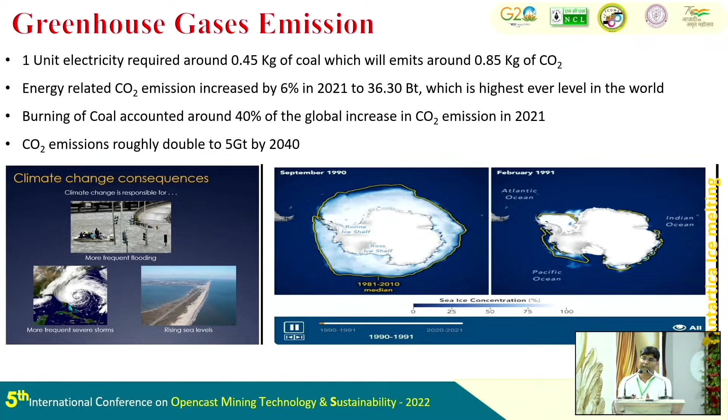For mitigation, India has made commitments for 2030, we have to reduce fossil fuel use and increase renewable energy. But in absolute terms, as energy demand is increasing, we will require more fossil fuel and coal. So for the net zero concept, by 2070 we have to achieve net zero.

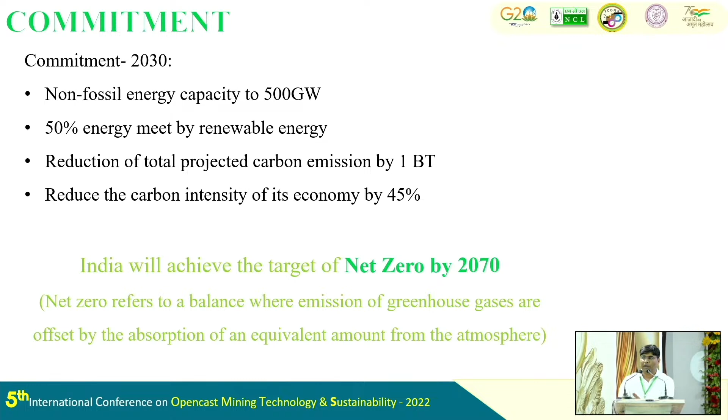For this, I have shown a concept of carbon dioxide sequestration, carbon capturing and CO2 sequestration. Basically, carbon dioxide sequestration is sequestrating the carbon dioxide in any sink where it is retained for a long time. That sink can be a chemical sink or a geological sink. Here we are talking about the geological sink.

Geological sinks may be unmineable coal seams, deep saline aquifers, and others may be depleted gas and oil reservoirs. In our concept, the coal seam is most important for us, since we are concerned with the coal sector. So we are talking about how we will be able to sequestrate carbon dioxide in the coal seam that is unmineable, so it may be sequestrated for the long term, meeting the net zero concept of the nation.

So the coal will absorb the carbon dioxide, and that absorbed carbon dioxide will be in 3 phases: free phase, dissolved gas, and adsorbed phase, with around 95% of the carbon dioxide sequestrated in the adsorbed phase. This diagram shows that absorption may occur due to van der Waals forces.

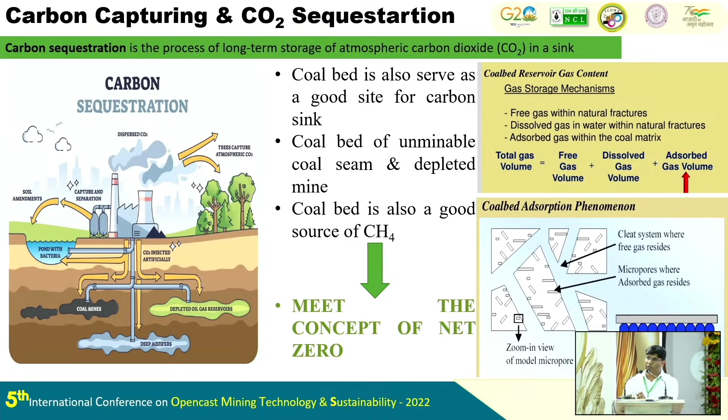This is a schematic diagram. We are showing how we can pump the carbon dioxide into the coal seam, where CH4 methane is in situ in the coal seam, that is CBM. That may come out as a consequence of the sequestration of the carbon dioxide.

Around 4 molecules of carbon dioxide will be sequestered, and 1 molecule of methane will be desorbed from the coal bed methane. This is the schematic diagram showing how the sequestration will take place.

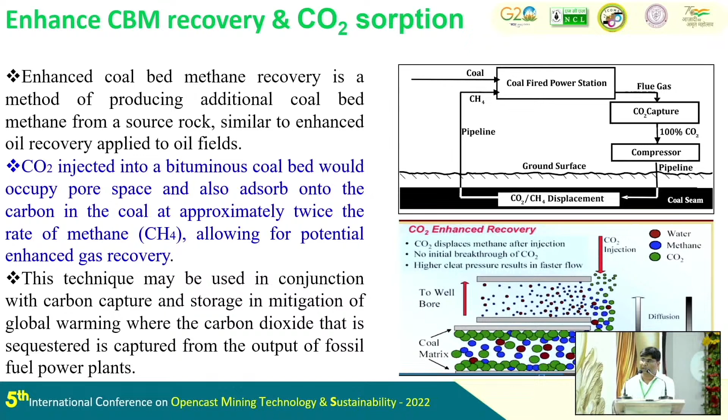This is our study area, the main basin of Singrauli coalfield, where some of the area covers the Raniganj formation and Barakar formation, with thin seams occurring. There is 0.2 meter to 2 meter thickness, and around 30 square kilometer area is demarcated for the study.

The Raniganj formation has 4 number of coal seams and the Barakar formation has 7 number of coal seams, and very thin seams occur there.

Depth is around 720 meters. Depth is very important because without sufficient depth we cannot have the pressure required to retain the carbon dioxide at in situ stages.

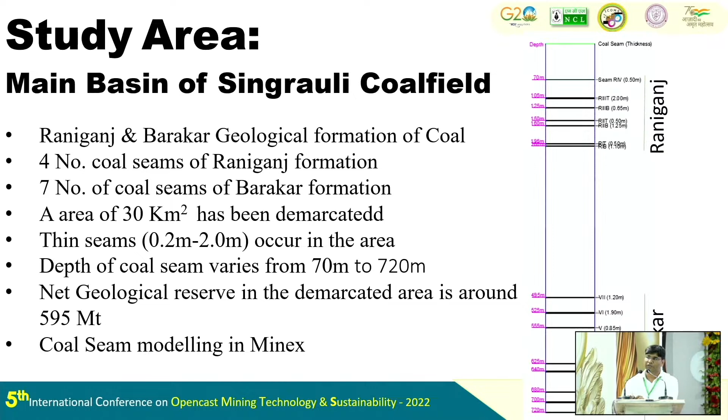So in the future, that area cannot be expected to be mined by either open cast or underground mining, since it is a very thin seam.

Two models have been used for the prediction of carbon dioxide absorption in the coal seam: the Langmuir equation and the GA prediction model. Here I have shown a graph.

As pressure increases, both carbon dioxide absorption and methane absorption increase, but carbon dioxide absorption increases more compared to methane. So 4 molecules of carbon dioxide are absorbed and 1 molecule of methane is desorbed from the coal seam at the same time.

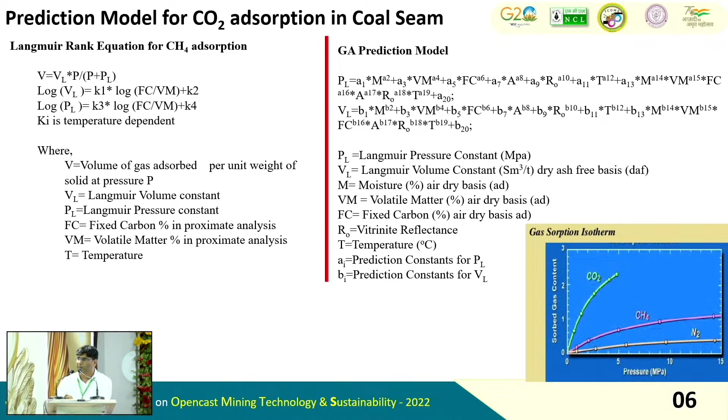That will be a boon for us. We can absorb a huge amount of carbon dioxide and store it long term in coal seams that are not mineable. That is very much beneficial for us, for the climate and for us as well.

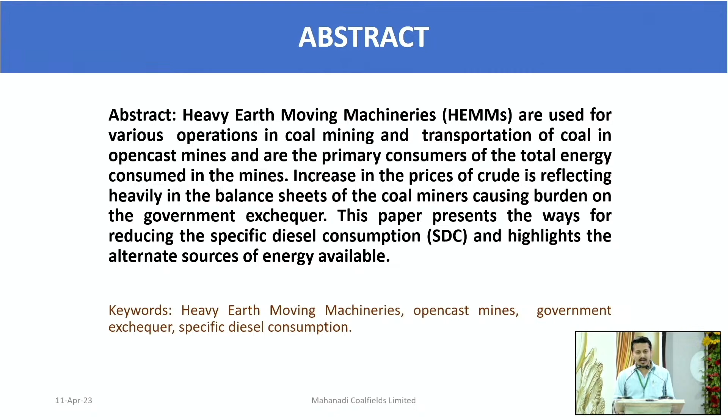Everyone in this house knows that mining is critical to India's energy security. India is the second largest producer and consumer of coal. The importance of coal for a country like India can be defined simply: even today, 75% of the total electricity consumed in the country is through thermal power plants. The coal ministry has set a mission of augmentation of coal production using government companies and also through private captive mines by following sustainable methods of mining.

As per the Atmanirbhar Bharat policy, the government needs to reduce its import dependence on coal, and is planning to tap the current reserves of coal available in our country. Diesel consumption is an important parameter when considering the competitiveness of the mining industry. Effective control on the consumption of fossil fuel helps mining companies improve their environmental ratings, and also helps in reducing greenhouse gas emissions. Hence, mining companies are now looking into reducing energy consumption to lower cost and emissions.

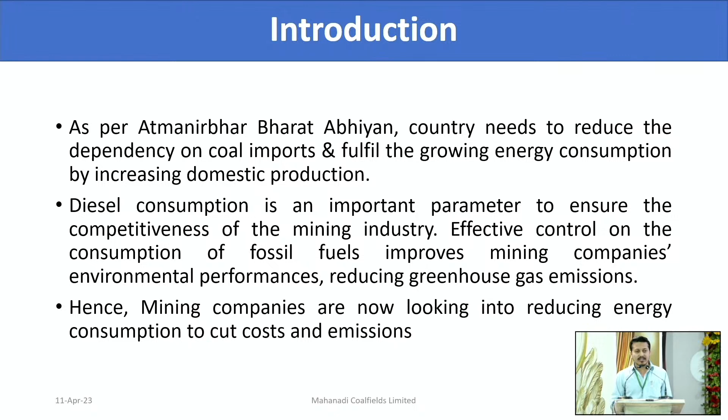Now let me come to open cast mining. Open cast mining is a surface mining technique of extracting minerals from the earth through an open air pit. Open cast mines are used when deposits of commercially useful ore are available near the surface of the earth. To create an open cast mine, miners must determine the availability of ore, done through drilling of probe holes and plotting them on maps. Before starting a mining operation, it is important to consider the quality, quantity, and economic value of the ore available beneath the earth.

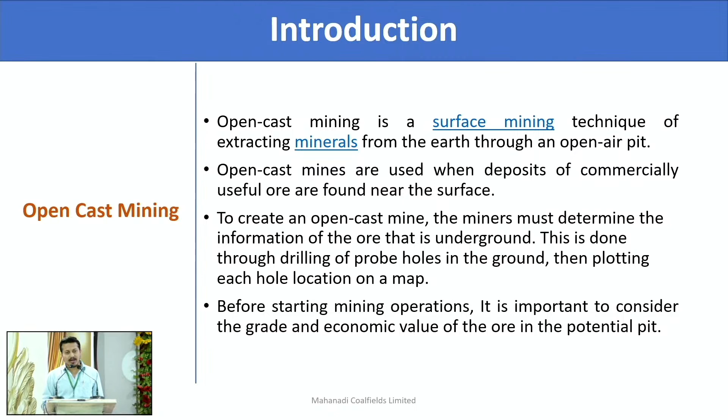Opencast mines are typically enlarged until the mineral resource is exhausted or it becomes uneconomical to extract the ore due to the increasing ratio of overburden. Currently in India, almost 95% of the total coal produced is through the opencast method of mining. The table below shows how at the time of independence, only 6% of coal was produced through opencast mining, but today 95% of total coal produced is through this method. This shows how important opencast mining is in India's energy scenario.

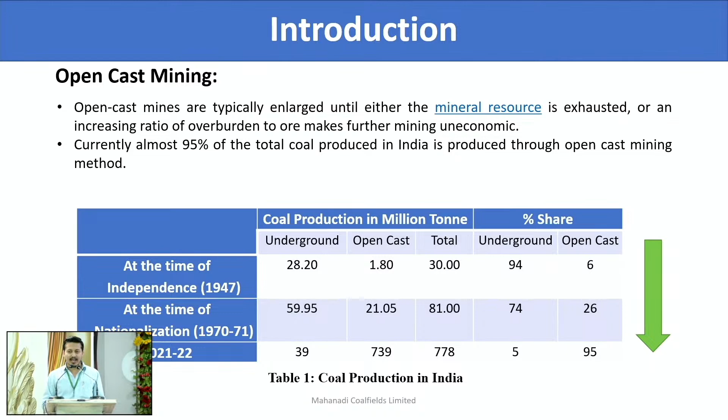Now let's come to specific diesel consumption in opencast mines. Diesel is a significant source of energy in the mining industry. It is used for removal of overburden, extraction of coal, and transportation of coal from face to pithead or to dispatch points. In opencast mining, various parameters affect diesel consumption, such as mine plan and layout, speed, payload and cycle time, tire wear and rolling resistance, age and maintenance of vehicles, dump site design, idle time, engine operating parameters, and transmission shift patterns. Besides this, other factors affect vehicle performance, such as weather and topographic conditions.

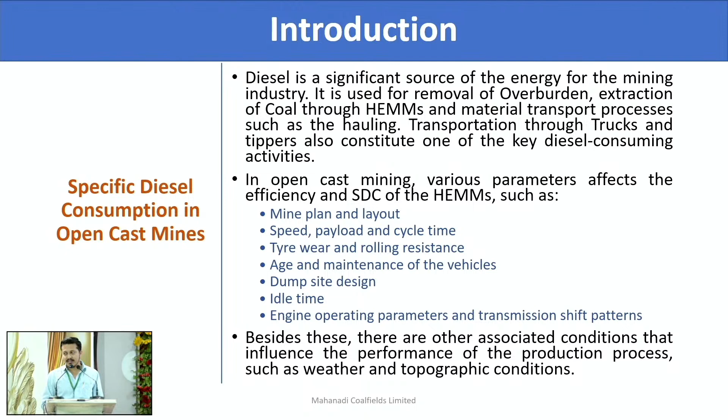Now let's come to the second part: ways to minimize specific diesel consumption in mining. First is by upgradation of HEMM size. Increase in HEMM capacity results in reduction of specific fuel consumption. HEMM capacity upgradation also leads to higher productivity and increased safety, as fewer individuals are exposed, and it helps in minimizing pollution levels.

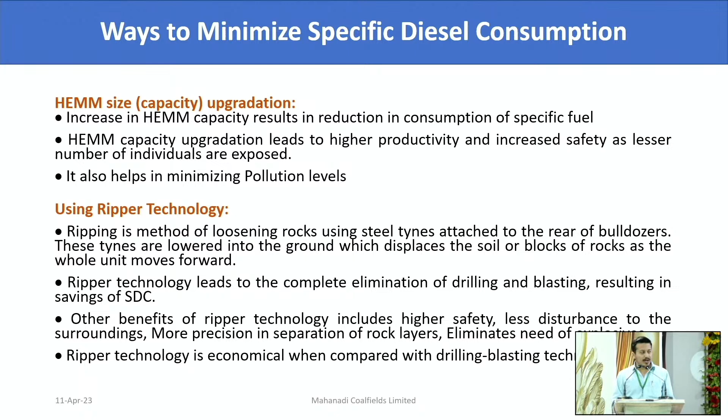Another method is using high angle conveyors for transportation of coal. Rise in depth of coal mines results in transportation of coal through trucks and tippers, which increases the specific diesel consumption of the mines. At greater depths, regular conveyors can't work. So high angle conveyors improve the economics of the mine and are also traffic and environment friendly. High angle conveyors can carry loads at up to 70 degrees or more in opencast mines, and are mostly used in deep opencast mines for transportation of coal, reducing cost and improving efficiency.

First mile connectivity project replaces the existing road transport between pit heads and dispatch points, switching over to a seamless mechanized coal transport using conveyors, a covered system for movement of coal from pit head to dispatch points. It helps in easing the load on road networks and saves on diesel costs. FMC also helps in reducing pilferage.

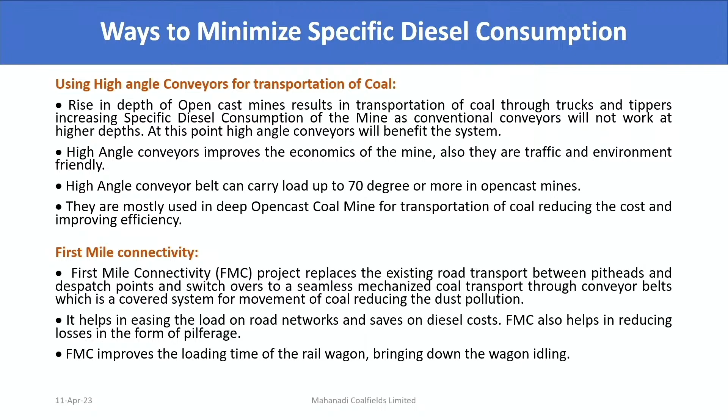Other way is by using the autonomous truck. A few benefits of autonomous trucks include 15 to 20% productivity increase, 90% expected availability, 5 to 7% rise in fuel efficiency, 7% less tire wear out, 17% maintenance cost saving, and 30% operation cost saving.

ATs have demonstrated notable fuel consumption performance due to their driving consistency, as they are driven automatically. They can operate 24/7 with no idling and no shift change required. Manual truck operators can affect fuel economy by 35%, whereas ATs can improve fuel usage by 4% with 25 to 50% reduced idle time.

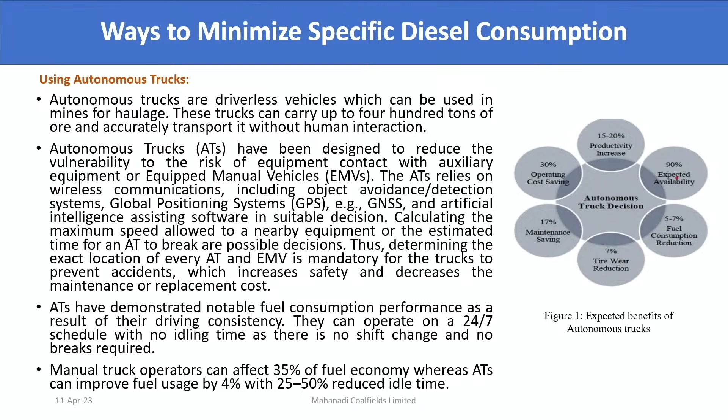Other way is by deploying electric vehicles and HEMMs in mines. Battery operated electric vehicles use chemical energy stored in rechargeable battery packs instead of diesel. They cut overall CO2 emissions and mitigate the risk of diesel powered vehicles on health and well-being of employees. It helps in reducing costs like ventilation and cooling, improves worker health, and generates a fraction of noise compared with traditional machines.

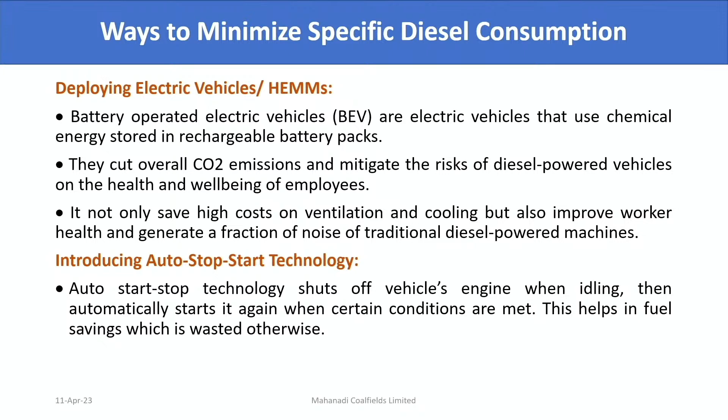Other way is by introducing auto start-stop technology. This shuts down the vehicle's engine when idling and automatically starts it again when certain conditions are met, helping save fuel which is wasted otherwise.

Other way is by implementing smart fuel management system, SFMS. SFMS is an IoT based tool which helps in end-to-end monitoring of fuel level, and helps in recording the receipt, storage and dispensation of fuel, which can be monitored online in real-time and viewed on a central portal.

This implementation can be done in a three-stage structure. First is installing automatic tank gauging system in underground tanks, which helps in monitoring the fuel level on a real-time basis.

Second, using an RFID-based dispenser, which helps in monitoring the exact amount of fuel loaded into devices like HEMMs and diesel bowsers. Similarly, with diesel bowsers, we can install an RFID-based diesel dispenser which helps record the amount of fuel issued to a particular HEMM.

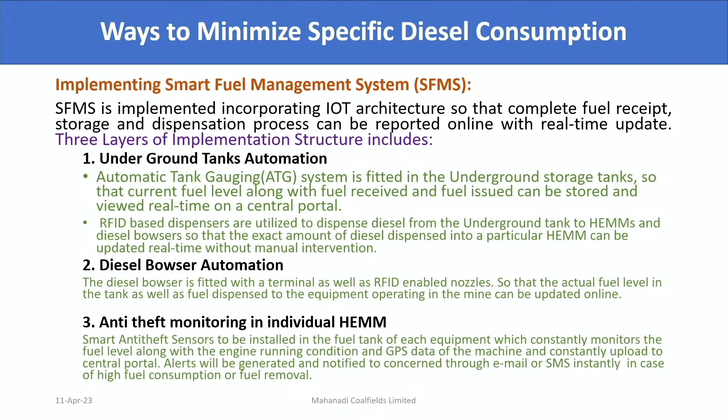Third is the anti-theft monitoring system in individual HEMMs, which helps monitor the fuel tank level in the particular HEMM. It also generates a SMS-based alert when there is a decrease in fuel level if there is high consumption.

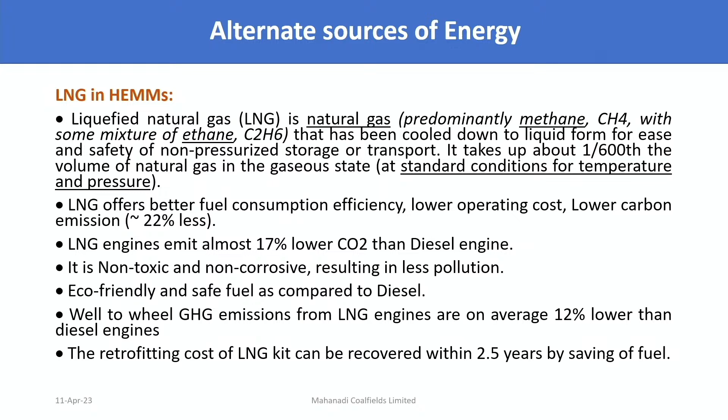Apart from this, there are other ways, including payload management, managing intersections, and idle time management. Now I would like to come to the third part, alternate sources of energy available. LNG can be one fuel used in our HEMMs. Second is hydrogen, which we can use as a fuel.

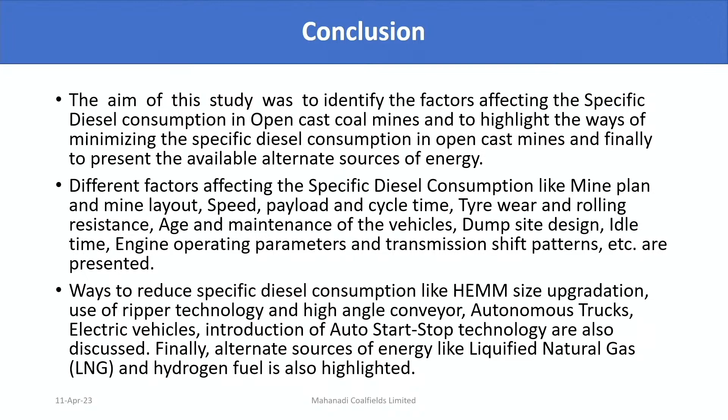With this I have covered the aim of my study, which included the factors affecting specific diesel consumption and the other alternate sources of energy available. These are the references. Thank you.

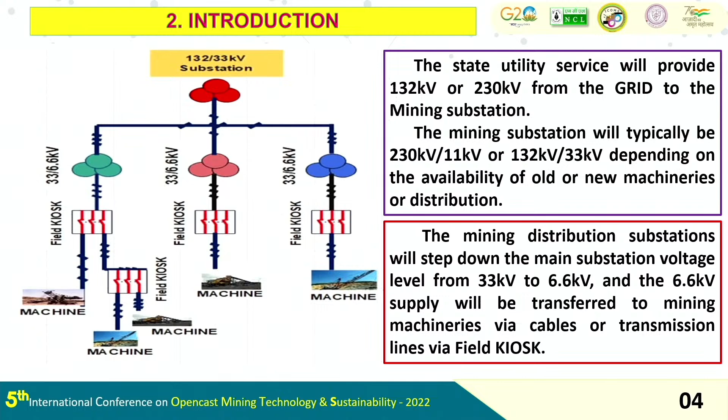So if you want to identify the faults, we have to start from the substation and go to each and every distribution kiosk, and identify each and every VCB to determine what type of fault has occurred there.

If you consider each and every field kiosk, it has some minimum number of inputs which are very critical in nature, like instantaneous earth fault release or overcurrent release, or the status of the breaker, whether it is on or off, or in a tripped condition or not. These inputs we can easily connect with the GSM modem.

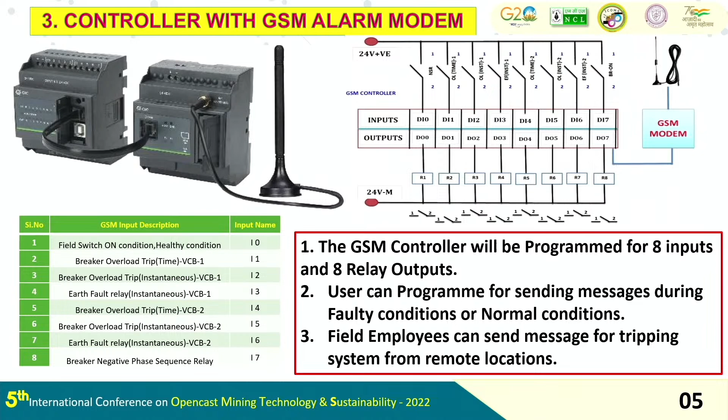This GSM modem will process the information and give a very clear output in the form of a message to the respective officers. We can configure 5 to 10 officers' mobile numbers there. For example, if a breaker has tripped due to the overcurrent relay, it will give very clear information to the respective officers that the breaker has tripped at field kiosk number 3. So we can easily identify and approach what type of fault has occurred.

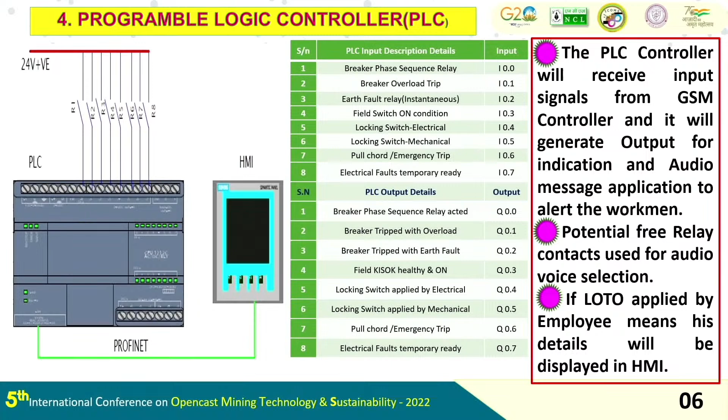Apart from that, if I want this information displayed in the substation or in the machine, we can connect the potential relay contact to the PLC, so that the PLC gives very clear information on which kiosk it happened in and what type of alarm came, giving a very clear pop-up information to the user.

We have also considered an audio system. This project is not simply applicable to the field kiosk alone; we can put it in any machine. If a fault occurs in the machine, the user or operator will want to know what type of fault has occurred.

For example, if somebody applies the pull cord emergency switch, we can get information on where it occurred in the HMI system, and we have also considered an audio speech voice system. For example, if an emergency locking switch has been applied by some mechanical crew, information on who applied the locking switch will be displayed in the HMI in a tag format, so the operator will know that this locking switch was applied by a particular crew, along with clear audio information.

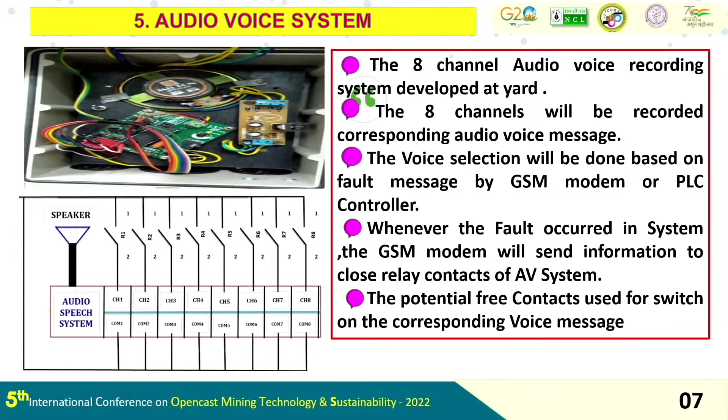We can store audio messages in this system, though there will be limitations. We have considered that 8 audio messages can be saved. For example, if the electrical crew applies the emergency switch, it will give audio information to the operator stating that the locking switch has been applied by the electrical crew and is pending with this person, and the HMI screen will show his photo and contact details.

This is the experimental setup.

The field card will have around 8 number of inputs wired to the GSM modem, and from the GSM modem it will send the respective officer's mobile number in the form of messages. It will also be connected to the PLC to display in HMI format, as well as in the annunciation window. Apart from that, it will give an audio message to alert the workman in the machine system.

As we know, some critical faults will be there, and some faults will be there that are not necessary but we have to maintain. Such faults may happen during the third shift. So the officer has to go, as the machine crew has declared that the machine is working, but this fault is repeatedly coming and due to that sometimes the machine gets disturbed. In that condition, we can take a decision.

The concerned authority can send a message to the GSM modem, so that the GSM modem will respond and loop the system over there temporarily. Then the system will run perfectly. We need clear information on who has looped this system. So the operator will get very clear information in the HMI stating that so-and-so authority has bypassed this system temporarily, and it is pending with the so-and-so officer. This will reduce the downtime and improve the system performance also.

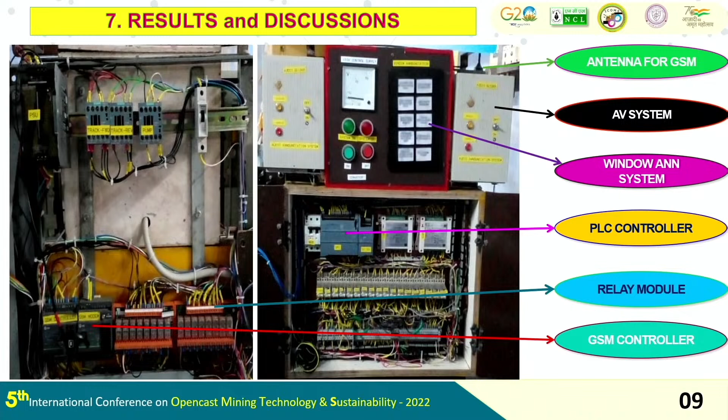This is like a LOTO system applied. For example, if there are 3 multiple divisions that have applied the emergency switches, we can get a tag showing who applied it, as per DGMS rules and regulations, in a LOTO format. If the concerned authority has applied the emergency switch, his entire details have to be displayed, so it is very easy to tell whether he has attempted it or cleared it. This lock-out tag-out can be created as a simple user format, making it easy to trace who has pending emergency switches over there.

In conclusion, there can be a maximum of 10 mobile contact numbers we can feed in, and we can get all the critical information which is required. One more thing is that for implementing this project, we don't need a cloud engineer or a computer science engineer. A normal C&I person, a normal electrical engineer, can do it in a simple way. This is a simple normal project with smart application. It can improve system performance and reduce fault diagnostic time. Thank you, sir.

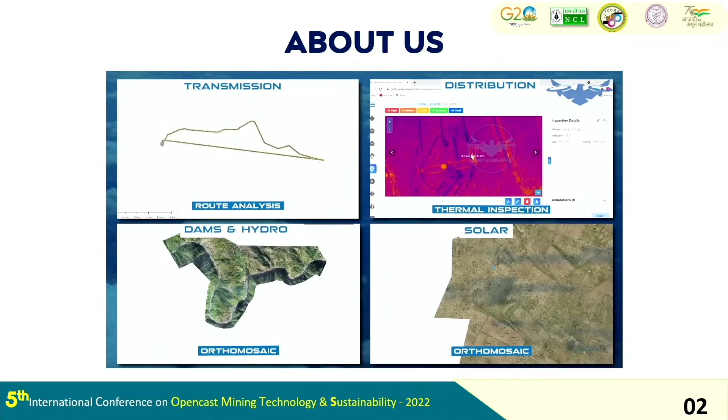We have diversified our services to different sectors. In power, we are providing services to transmission, distribution, solar and hydropower projects. We are also providing services to different sectors like coal and mines, irrigation and water resources, railways, metros, and highways.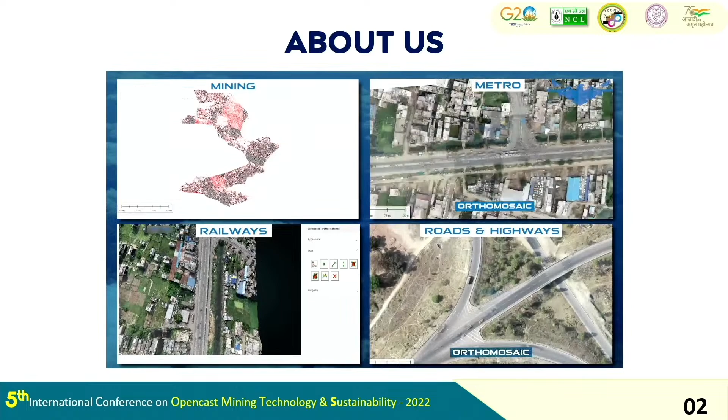We are automating the manual processes of each phase of a project, like survey mapping, progress monitoring, inspection and surveillance. Our AI powered platform Bluehawk is helping us automate the manual processes in these sectors.

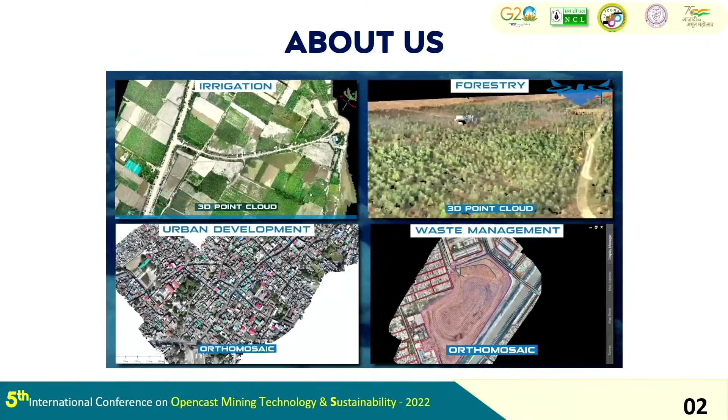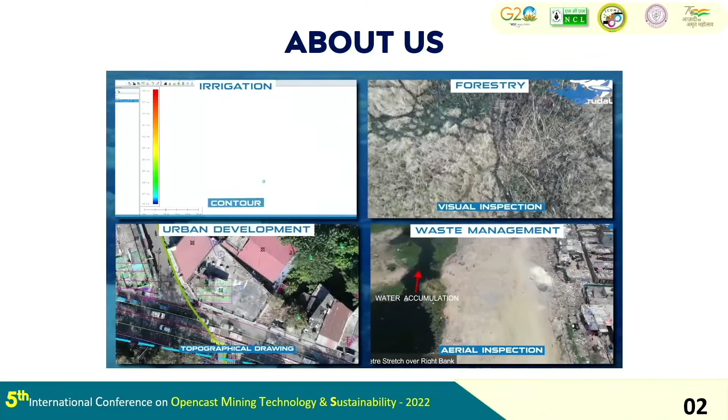We are using different types of equipment for different projects. For small scale projects, we are using quadcopters. For mid-level projects, we have our own in-house VTOL drone X2. We are using LiDAR as well as photogrammetry cameras for survey mapping. And for large scale projects, we are using manned aircraft with airborne sensors.

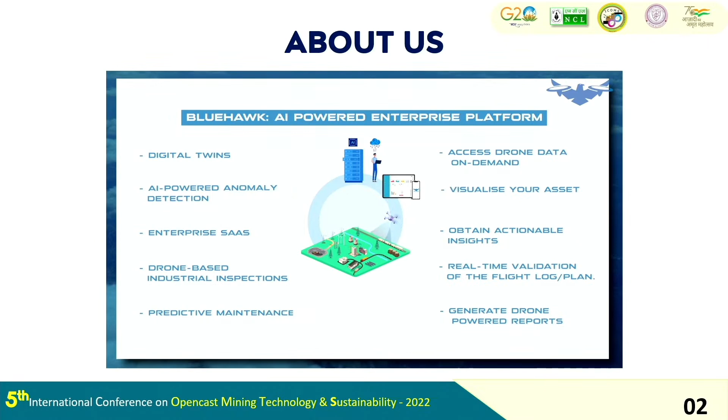A company called Garuda UAV has given its services and done a very detailed mapping. So definitely it has been a great help.

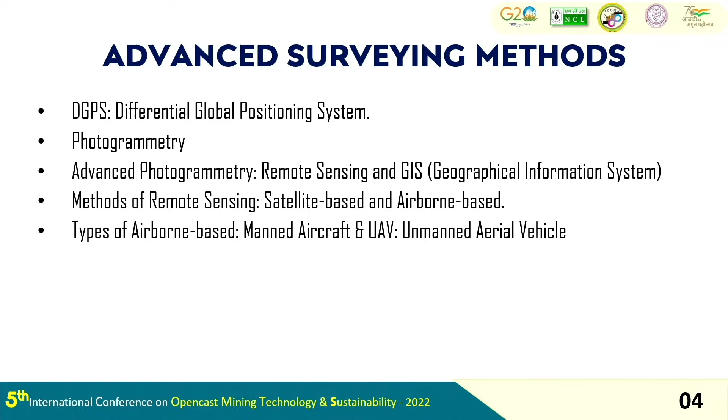Now we are not the first to do that. There's already a lot of innovation going on continuously, like DGPS, photogrammetry, and a lot more. In the advanced version of photogrammetry, you have remote sensing and GIS software.

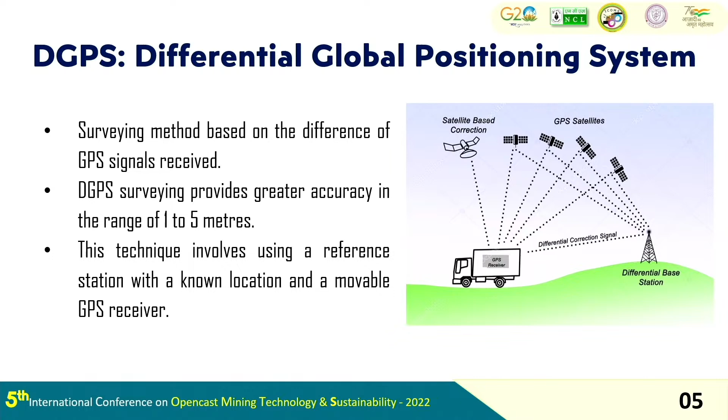If you have a little brief about DGPS, it's basically that there's a base station with known coordinates, and then there's a movable receiver.

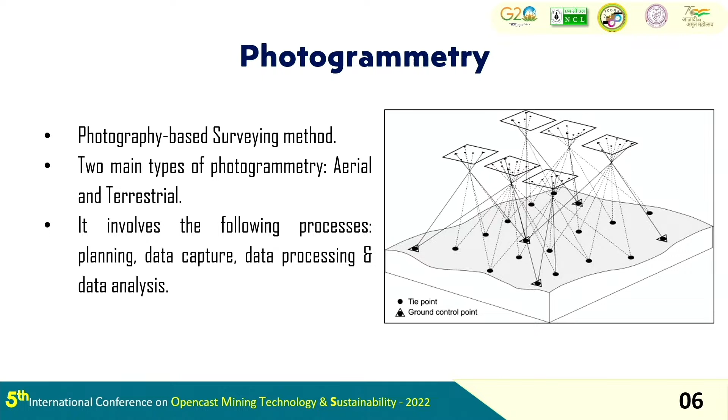Then there's photogrammetry. Photogrammetry stands for using photographs to create 3D models. There are two types, aerial and terrestrial, and there's a basic procedure in which we take images, then stitch them, and then create the data points.

Then comes remote sensing. There are two ways: satellite-based and airborne-based. Satellites, as you all know, are already hovering around the planet, so they continuously collect data for Earth observation and many other things.

But there have been quite a few challenges in using satellite data as well. First of all, since it's already collecting a lot of data continuously, it's not ad hoc - you have to trim the required area of interest from the given data set, and you also have to be dependent on the satellite itself for data collection, which has its own timings. It also covers a larger area, but the accuracy is not that good.

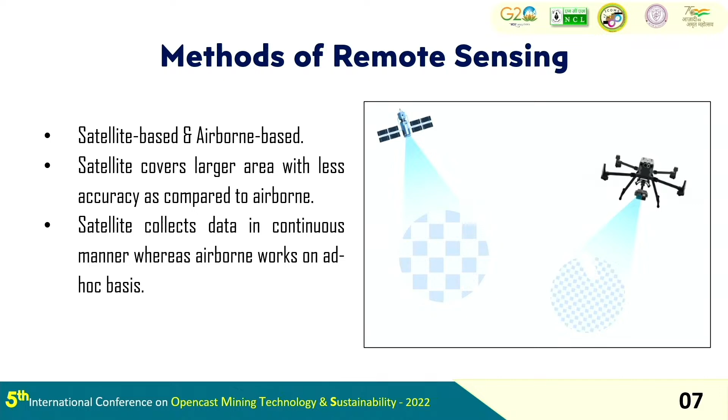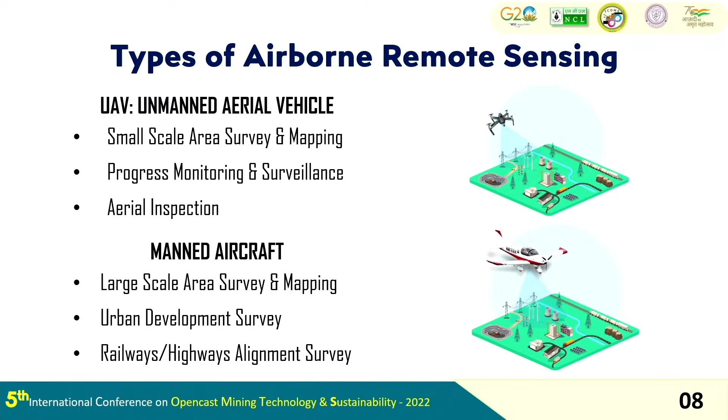To counter that, we have our own airborne-based remote sensing, in which, as shared in the video already, we can use aircraft, helicopters, and in the advanced version, UAVs - unmanned aerial vehicles. These are small in size, can be used as per your convenience, and provide the best accuracy. They are also customizable, as you can put in as many sensors as you want as per convenience.

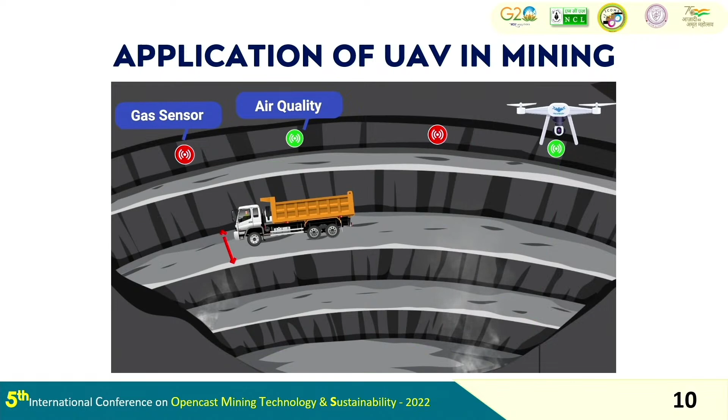Now let us see the drone-based application in mining operations. Sensors for gas and air quality monitoring will be fitted. The drone can hover inside the mining site and inspect the width of the haul road as well as gradient of the haul road. The drone can also scan and analyze the conditions before, during and after the blasting process.

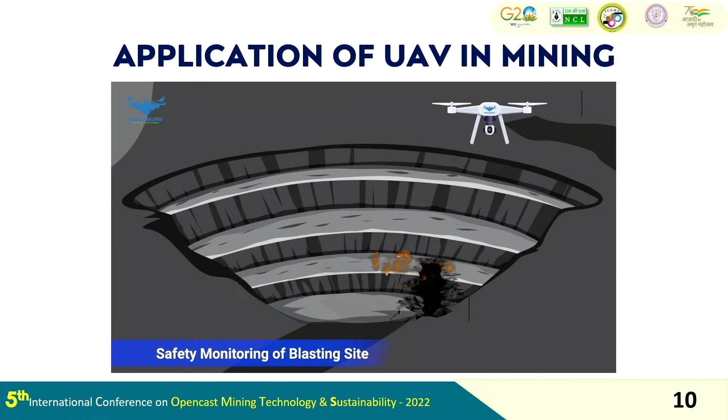This would aid in impact assessment of the whole blasting site at once. For example, before the blasting it was expected to blast this much. Once the blasting process is completed, it was observed that the actual blasting zone is bigger than they expected.

Drone-based solutions can be applied to mining areas, railway lines, solar plant inspection, transmission assets, HEMM, to name a few.

The volumetric estimation of the stockpile will take place. Unlike a human-led approach, the drone will scan, detect, record, and provide the volume of the stockpile. The AI platform will verify the calculated volume while measuring the correct dump height and slope of the stockpile.

We also secure the mining area from dacoits by drone-based theft detection. We also identify parts of the mining area encroached by illegal settlements and regularize the safe distance from the actual mining site.

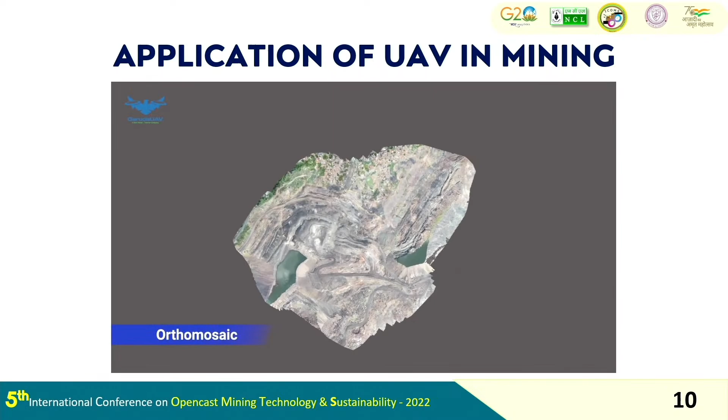The drone will map the whole mining site point by point and then, using the AI-based digital platform, provide the deliverables such as ortho mosaic, 3-dimensional point cloud, and detailed volumetric report.

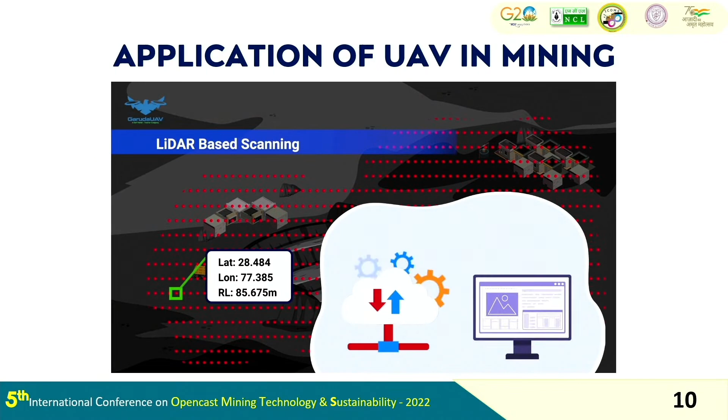Garuda UAV focuses on hybrid survey using GPS-based ground control point collection. LiDAR-based drone scanning will provide the digital terrain model, also known as DTM. Our expertise includes land reclamation, rehabilitation, and plantation height monitoring.

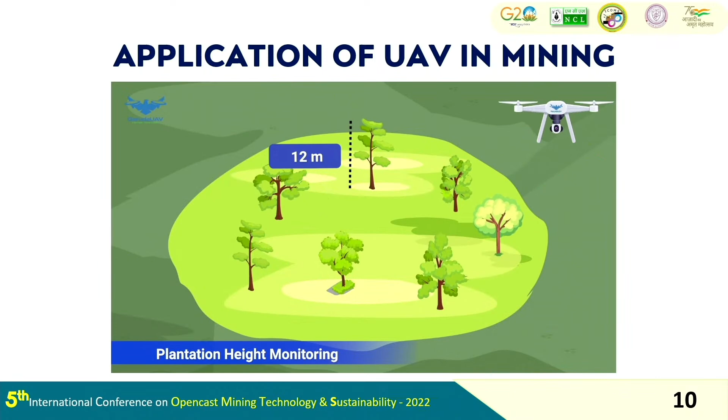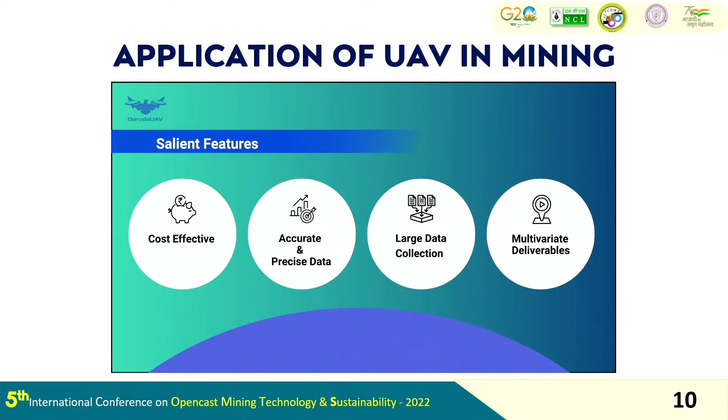We made it possible to standardize, formalize and digitize the typical mining processes. Implementation of drone services combined with the state-of-the-art digital AI platform will contribute towards a holistic and sustainable approach of the mining sector by Garuda UAV.

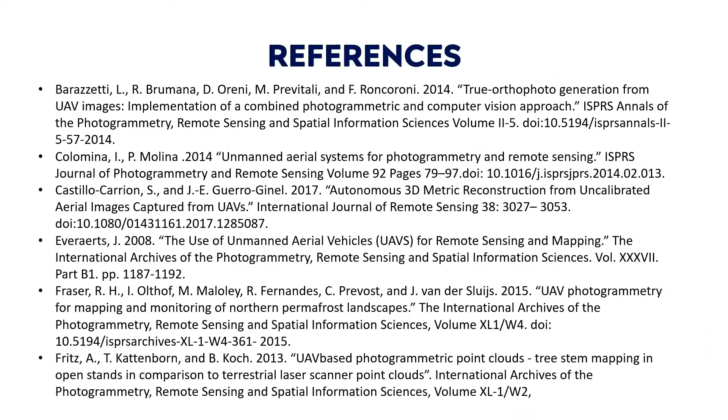Thank you, Vidit. We had an interaction with Mr. Brijesh also, and we had two presentations within your presentation.

From your videos, it was very much clear that now software is coming in a big way in all the fields, including mining, and in surveying this will play a big role. Considering the timing and cost factor, the mines will be benefited with the use of this technology.

Now, our team tried to connect to GCE Keonjhar. In spite of their best effort, GCE Keonjhar could not be connected. So now with this, we have come to the end of this session. I will ask Mr. Suman to summarize.